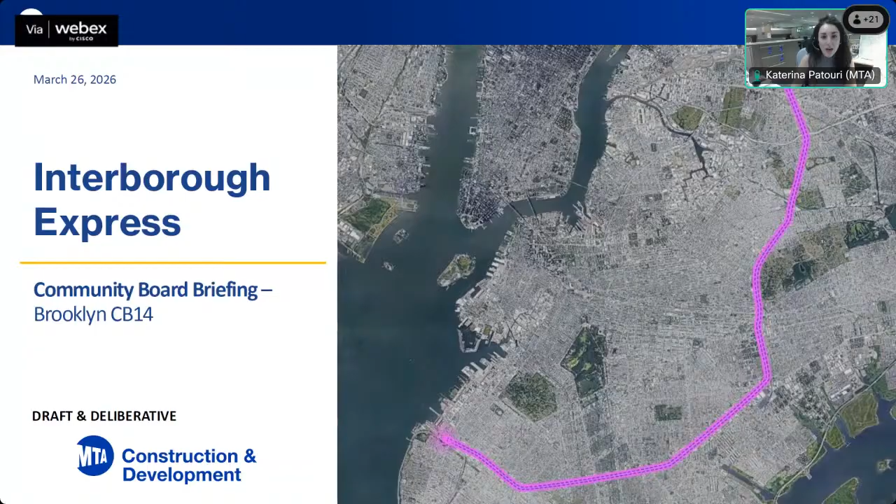This is a project that's been a long time coming, but we're very excited that we have, as of now, officially begun the preliminary design for the project. So with that, we have a presentation prepared for you this evening. We will have some time as well for Q&A at the end of the presentation. We may not be able to answer all of your questions at this time, as we are in the beginning stages of our project design. But just to reiterate, this is not the last time that you'll be seeing us. This is just the first of many touch points that we'll have with you on the project. So we look forward to answering questions not only this evening, but going forward into the future as we make progress on our design and look for opportunities to get more of your feedback and input.

So with that, I will pass it over to Ali, who will begin to take us through the presentation. Thanks all, thanks so much Katerina. Can everybody see my screen? Okay great. So I'm sure many of you know about this already.

For those who don't, what is MTA's Interborough Express? IBX is a proposed light rail line that would provide a transformative new connection between Brooklyn and Queens. And the good news is we can do this within an existing piece of infrastructure, a rail corridor that is currently used for freight. As you see on the map here, the existing corridor spans from Brooklyn in the south, starting in Sunset Park, and goes all the way up to Jackson Heights in Queens to the north. It's currently used by several freight trains a day, I think 1 to 3. IBX is adding a passenger service to this existing corridor while preserving that freight service. So essentially, IBX would be running on one side with freight on the other, but they're two entirely separate systems.

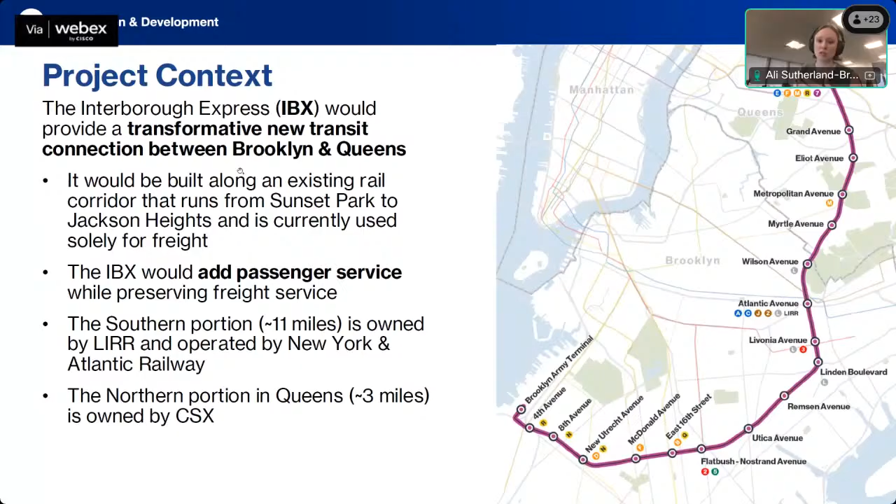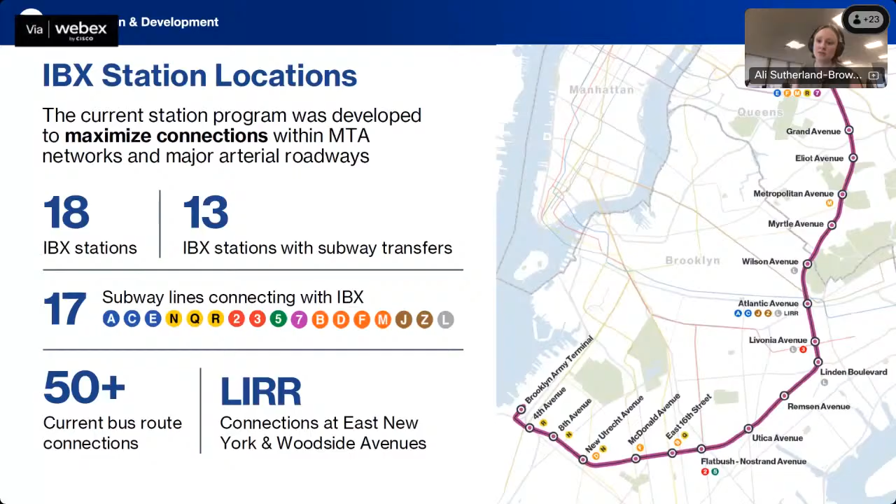That means today, an 18-station program designed to maximize existing connections to the existing transit and major roadway network, specifically connecting to 17 subway lines, over 50 bus routes, and the Long Island Railroad.

We use the word connection a lot when we talk about this project, and I want to get even more specific about what this connection actually does for residents and businesses, specifically here for Community Board 14. At a high level, this means time that you and your neighbors get back for yourself, for your family, for your friends, and then access to opportunity that IBX unlocks.

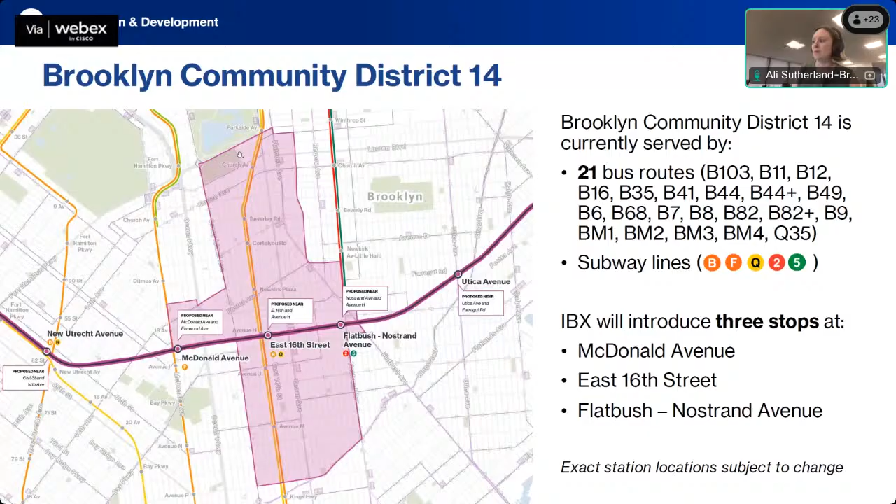Community District 14 is currently served by 21 bus routes and 5 subway lines, and IBX would introduce 3 stops in district: at McDonald, at East 16th Street, and at Flatbush Nostrand. But what do these stops really do?

At a high level, this means that residents gain access to jobs and employment hubs, amenities, recreation, and more. And businesses expand their customer bases multifold, as well as the pool of talent who are able and willing to come to work for them.

And neighborhoods and destinations for CB 14 really expand across the 2 boroughs, as far north as Jackson Heights, as far northwest to Brooklyn Bridge Park, and in the southwest to Sunset Park and Brooklyn Army Terminal.

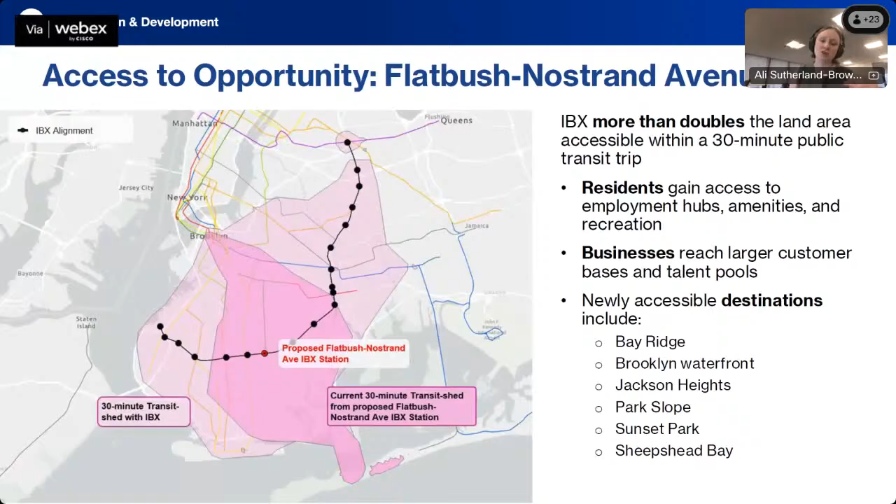Just using Flatbush Nostrand as an example, this means more than doubling the number of jobs, healthcare facilities, and daycare and pre-K that are accessible, increasing higher ed institutions by about 1.4 times, almost doubling the number of cultural institutions reachable in 30 minutes, and then for those businesses, reaching over 2 times the working age population who could shop at, join, or work at your organization.

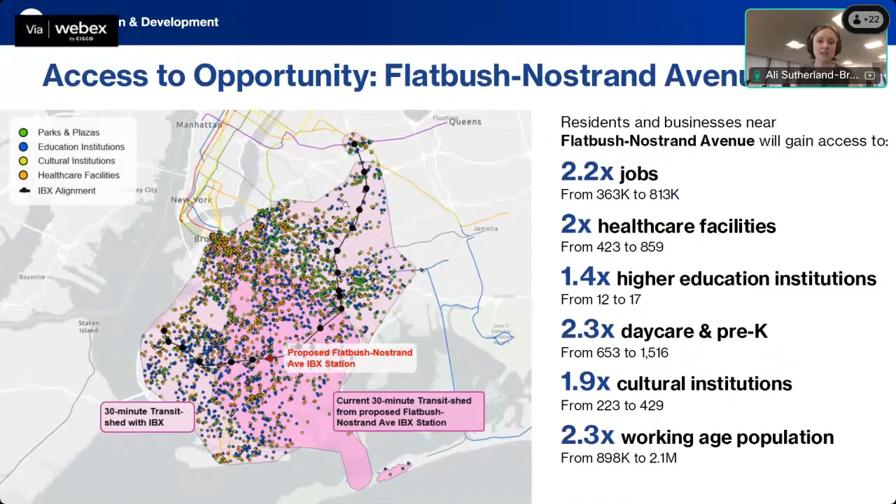We've developed these slides for all 18 IBX stations, and I'm happy to come back to the East 16th and McDonald versions in Q&A.

Finally, before I hand it over to Katie, I want to talk about the 2 simultaneous moving parts to the project right now: environmental review, and then Katie will talk you through design.

MTA kicked off the SEQRA process in October 2025, and this included a scoping phase where we were defining what's being studied, which we did with 2 in-person and 2 virtual meetings. Through that process, we received over 500 comments and are in the process of incorporating those right now into our scope of work. Later this year, MTA will publish a final scoping document along with the DEIS, or Draft Environmental Impact Statement, which will outline both those potential impacts and mitigations to those impacts.

Also included in the DEIS is information about property acquisition, which we know is a big concern for people living along the corridor. Because IBX is located within an existing rail corridor, we have the benefit of using this existing piece of infrastructure and limiting the need to acquire private property. But that said, our number of acquisitions will not be zero, and a small number of properties will need to be acquired for IBX to function.

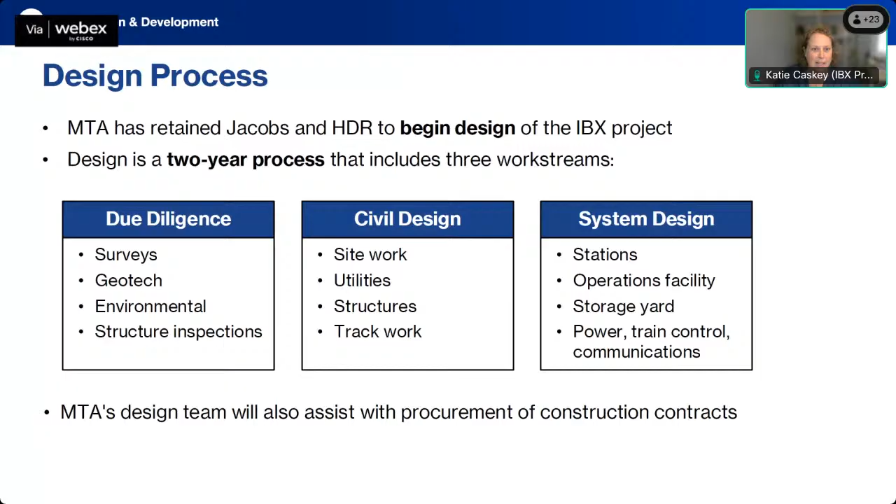Now diving into the active work. As part of due diligence, the design team has been out collecting information about existing conditions. This information will tell us about the project's feasibility and any changes we might need to make from early assumptions based on the real world conditions of the corridor.

We started this fieldwork at the south end of the corridor in late 2025 and are largely working our way north. We anticipate this work being complete in the fall of 2026.

For an update on your area specifically, in Brooklyn we are roughly halfway complete, but for Community Board 14, we've completed 44 investigations with 7 more to go. So while we're largely complete in the area, you can still expect to see crews out working along the corridor in the upcoming months.

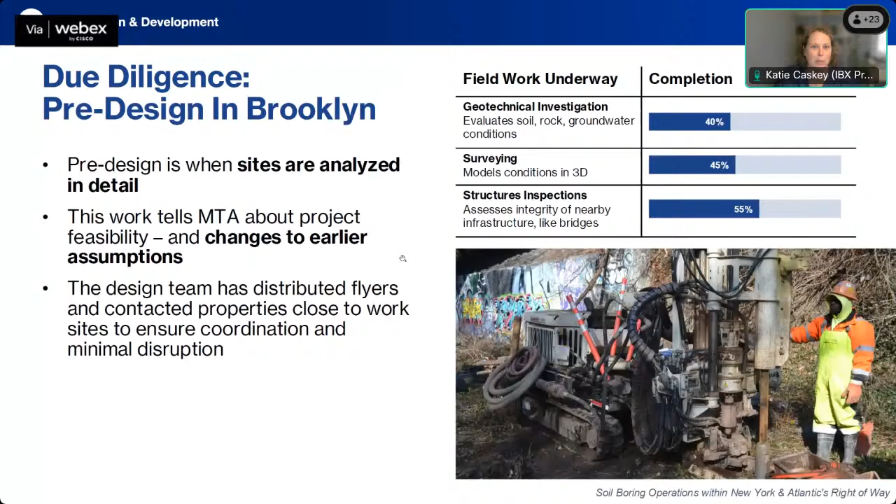Along with this work, the design team has been out flyering within the community to inform people of the work happening. We provide notice roughly 2 weeks beforehand to addresses within 100 feet of the work locations, and we've also been contacting properties close to each location directly to ensure minimal disruption and maximum coordination.

Now to dive into another active work stream, which is the systems design. This work began in fall of last year as well and continues into today. As we design the stations and the urban realm, we are prioritizing things like creating a positive future passenger experience, stations that integrate well into surrounding neighborhoods, accessibility, and connections with other modes of transportation.

But as we do this design work, we also want to know what matters to you all and your neighbors. We will be hosting 6 public workshops in April and May of this year to ask for input on these and related items, and Katerina will talk a little bit more about that at the end.

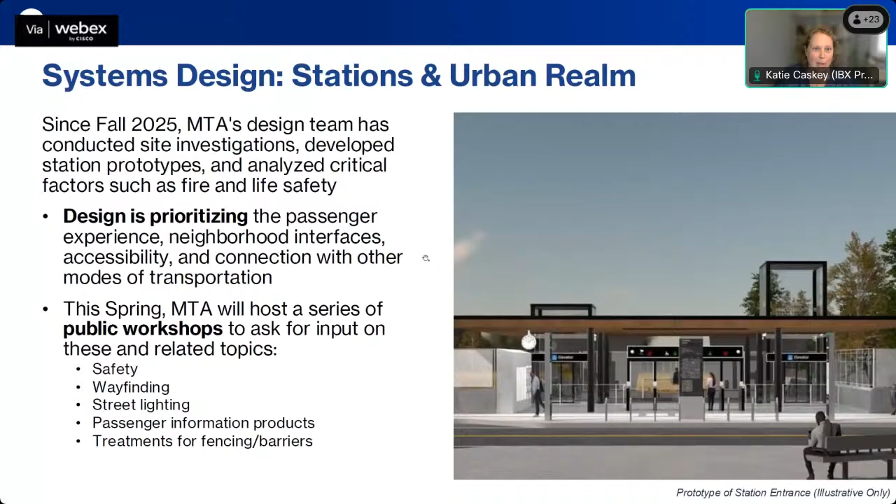Now transitioning to community focus areas. Now that we've walked through the current work, we want to talk a little bit about what we've heard from previous public outreach and how it's informing our design choices as we're in this design phase now.

The first topic I want to talk about is stormwater management. Our goal here is really to be a good neighbor, which means we need to work across government with the agencies that manage other city infrastructure like water and sewer systems. We've been meeting with the city's Department of Environmental Protection to understand current conditions and coordinate for design.

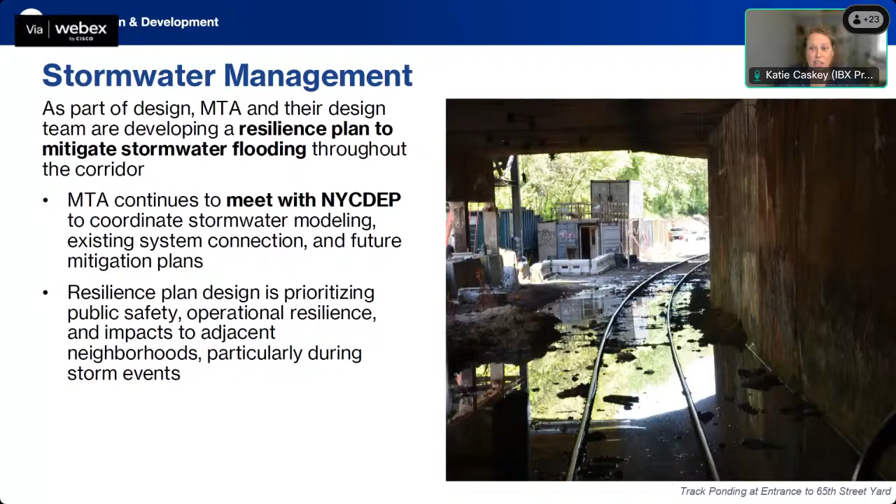We know that portions of the corridor, which are currently a trench, have flooding issues today, as you can see in the photo here near 65th Street Yard. So we need to be comprehensive and look at stormwater and flooding today and think about adaptation for the future. Our entire transit network needs to be resilient to meet New Yorkers' needs, and our engineers are working on a resilience plan customized for each and every neighborhood along the corridor.

The second topic we've heard about is electrical grid capacity. Similar to stormwater management, our team is studying resiliency measures for electrical design. We've heard from the community about grid reliability and capacity, and we want to get ahead of infrastructure capacity issues. Our team has been meeting with Con Edison to understand current conditions and coordinate integrating IBX into the system. It's critically important that we align with utility providers to ensure IBX electrical needs can be met by the grid today and tomorrow.

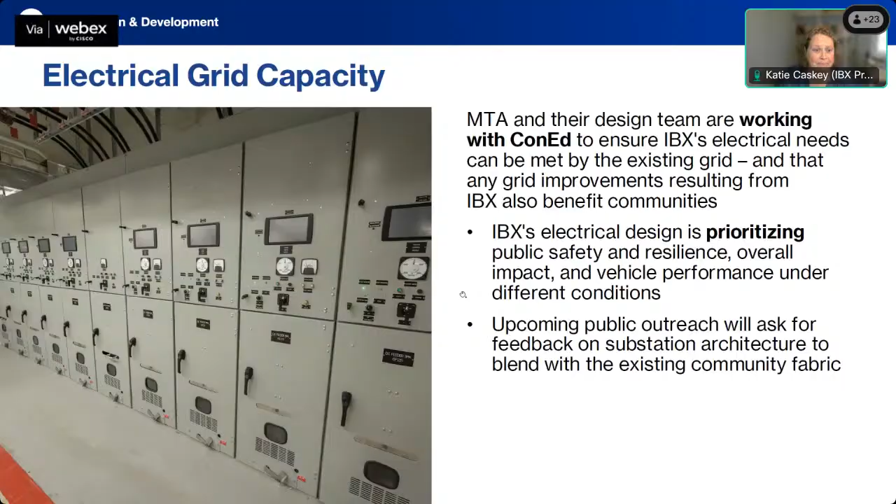With that, I'm going to turn it over to Katerina, who will talk about next steps and upcoming outreach. Thank you so much, Katie. We are extremely excited to be in the design phase in earnest and doing a more robust public outreach campaign this spring.

We talked a little about the public workshops, but really that's going to be one of our main touch points with the community to inform our design decisions. Please look out for those dates and locations coming out soon. These are going to be focused on getting specific feedback and input on things like stations, urban realm connections, layout of our vehicles, and other things like safety, wayfinding, and customer experience items in the system.

We also are going to follow up to receive formal comments on the DEIS as part of our environmental review process, and that is coming out later in the fall of this year.

So one big takeaway here is we really want to meet people where they are. We really want to get as much feedback from neighborhoods as possible, especially on the specifics of how the IBX will be utilized, how it will serve these communities. You know your community the best.

So if you have input or suggestions for us on locations we should go to, groups we should talk to, meetings we might want to attend, we are happy to take those suggestions today or anytime within the next couple of weeks or months. We're looking forward to keeping in touch throughout the life of this project.

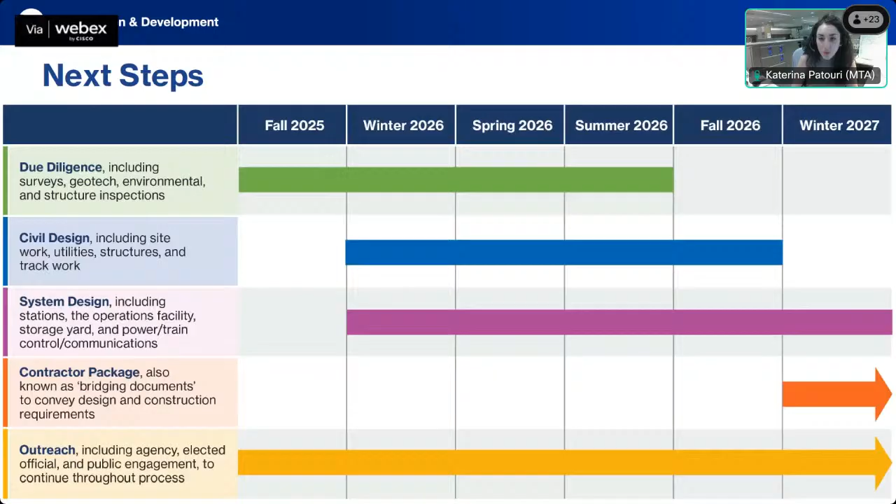The outreach we will continue to do throughout all of these streams. We really want to make sure everyone is kept up to date on all of these milestones and phases as we continue working through the design. So we will make sure to continue to keep the community board informed, as well as our elected officials, and all the groups we identify in each neighborhood throughout the corridor.

So with that, I'll give it back to you, Shawn, to open us up to Q&A. We are excited to be here to answer your questions. As I said before, there may be certain questions that we don't have the complete picture or complete answer for you today, but we're happy to take any question, and of course continue to be in touch with you as you speak to your neighbors and maybe have more questions for us on the project. So thanks again for your time, and Shawn, back to you.

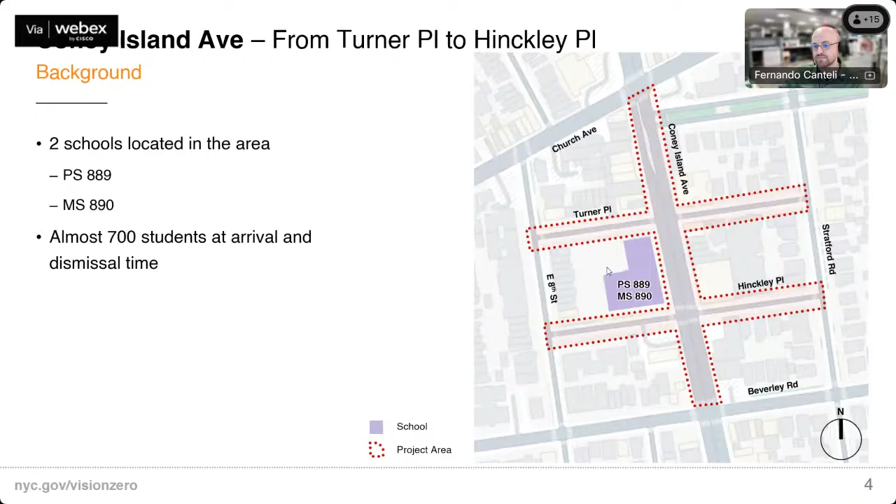4 of the injured were youth, young people under 18, and 7 pedestrians were injured. Of those 7, 2 were actually crossing with the signal as they were supposed to, and 3 were crossing mid-block.

Let's look at the shape of the street and existing conditions, and why some of them are concerning. This section of Coney Island Avenue is 70 feet curb to curb, that's the area we can work with. There are 2 travel lanes per direction, with turn bays in the middle for adjacent streets. It's also a local truck route and a corridor where multiple express bus lines and one standard bus line run through.

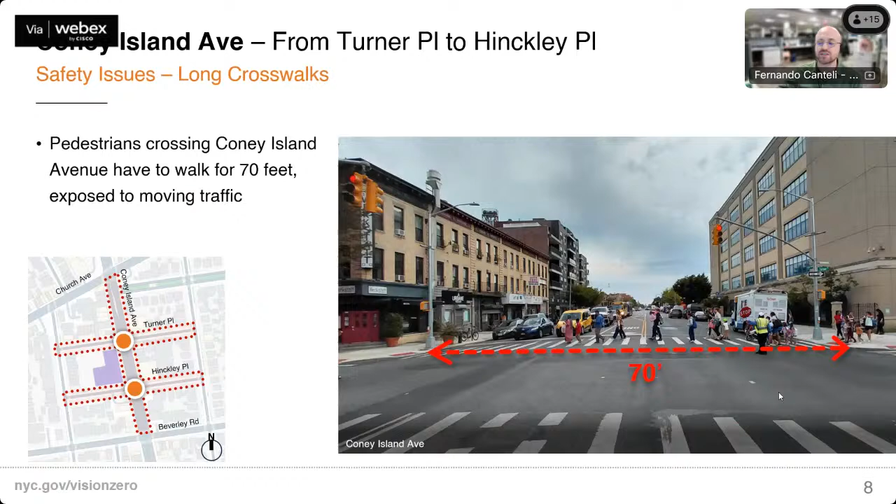In this section, looking north, the school is the blue building with a small garden in front, with a 15-foot sidewalk, which is generous and great. But there's a very long roadway to cross every day for students. A traffic signal was recently installed at Turner Place and Coney Island Avenue, but it's still 70 feet long, so little kids with their parents and middle schoolers have to cross in a short amount of time, exposed to moving traffic the entire time.

Another thing we've observed in front of the school is illegal U-turns. Vans or cars make U-turns sometimes right on top of the crosswalks, which is very concerning and creates dangerous conditions for pedestrians and even for drivers.

So this is just a draft plan. We want to show it to you and get your feedback. It's kind of a very simple idea, but we think it's a great improvement for the school.

As a proposal overview, we want to convert Turner Place to eastbound between East 8th and Coney Island Avenue, and Hinckley Place to westbound between Coney Island Avenue and Stratford Road. So Hinckley Place becomes westbound and Turner Place becomes eastbound for the entirety of the street.

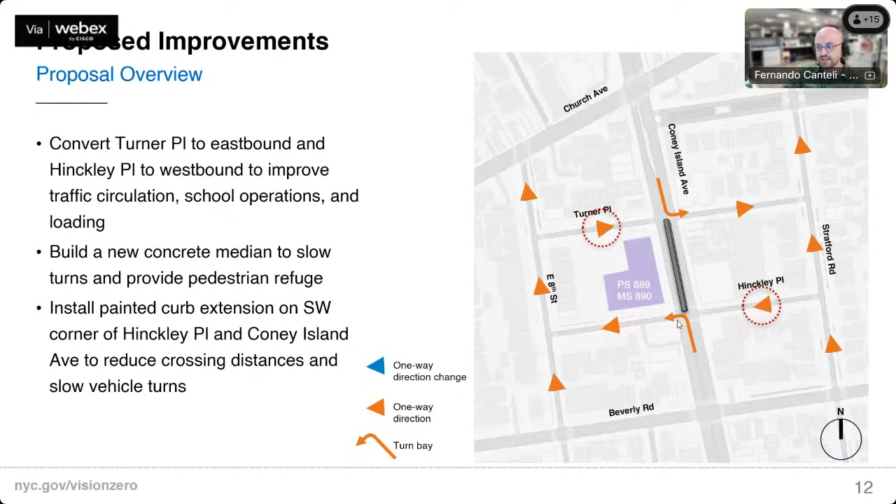We also want to install a small painted curb extension in the corner of Hinckley Place and Coney Island Avenue, in the southwest corner, to reduce the length of the crosswalk. So it's very simple, it's just two street direction changes to make it consistent.

This will facilitate less circuitous trips. It will also be great because one of the things we want around schools, in every school frontage, is right-hand side door access for school buses. So Turner Place will become great for buses to load and unload too, because the buses will be in the direction where the door for the kids to come in and out is on the right side of the school.

Also, this gives us the room I was mentioning for that concrete pedestrian island. So as you can see here, this is the existing condition, and this is what we are proposing: just a concrete median that will reduce the crosswalks and provide a pedestrian island, and a painted curb extension in this corner.

That's it, we'll just change directions. We'll work on small changes to the signals for the direction changes, but that's mostly the entirety of the work. So as we're saying, a median provides refuge for pedestrians and really eliminates the possibility for illegal U-turns on the street.

Our main objective as a school safety unit is to really care about the safety of students coming in and out of school during arrival and dismissal. We visited the site multiple times during arrival and dismissal, and we've worked with the school on different curb regulations to improve school loading and everything around it. Our main objective is to make it safer and more consistent for all the residents around it.

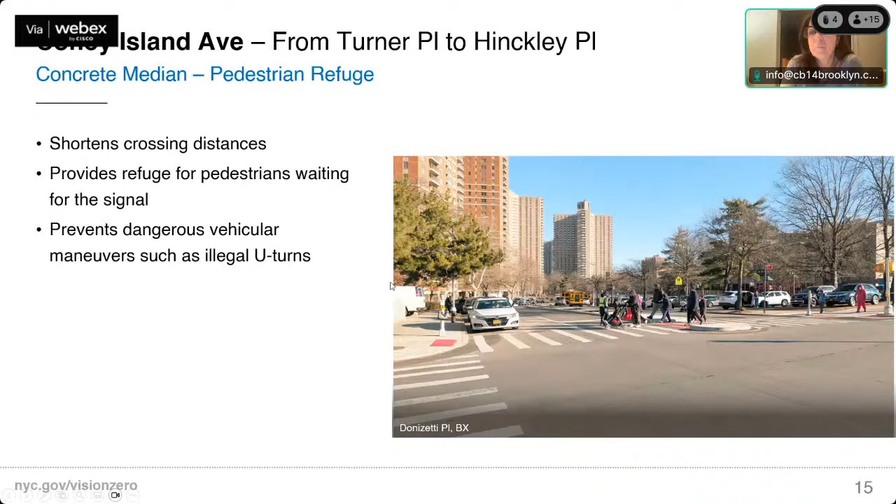Go ahead, Matt. Hi, thanks so much for bringing us this project and presenting this. I think the concrete island thing is a great idea, and you should definitely go forward with it. I think one thing I've observed is that the intersection at Church Avenue and Coney Island Avenue, which is kind of in the scope here, feels even more dangerous to me. And I know a couple of people have been killed there in the last decade or so.

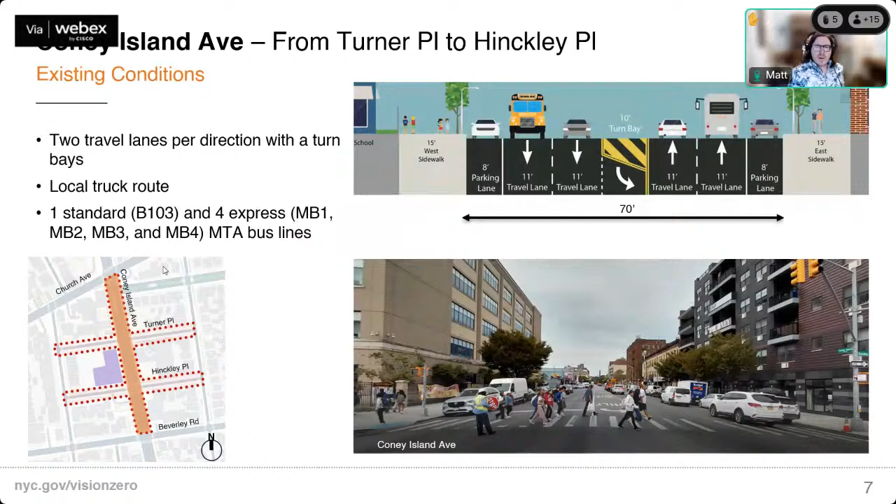I definitely see a lot of students crossing there as well. The B35 bus is there, there's the pizza place on the corner and businesses up and down Church Avenue, so it's a natural place to cross. I'd love to see DOT come back with some proposals for improving safety here.

To give one idea, this is kind of a weird five-point intersection because of the way Albemarle Road comes into it. When I see cars turning in, when I cross Albemarle Road on Coney Island Avenue, it feels like there's very little residential traffic to the single family homes there, and it's not too hard to get into the neighborhood there. So people are just cutting through to avoid the lights on Church Avenue. It seems like a good place where we don't really need Albemarle Road to connect to Coney Island Avenue, and that would simplify the light timing there.

It would simplify the intersection. We definitely see there are unusual rules there with the flashing red light and other things, and drivers don't follow them at all, basically. So that would be one small change, but I'd love to see even bigger changes that could help the whole Coney Island Avenue corridor. But that would be a good place to start. Thank you.

Yeah, so we definitely agree that all the issues you've highlighted, especially at that intersection, are concerning. There's also a curb that has been destroyed this last season, and we're working on getting it replaced. But as we were telling the schools, because we met with them several times, this is a start in front of the school. Obviously DOT has to work thoroughly on the entire corridor of Coney Island Avenue, and Church and Beverly Road are two concerning points. The numbers are very high, and we have to work on that.

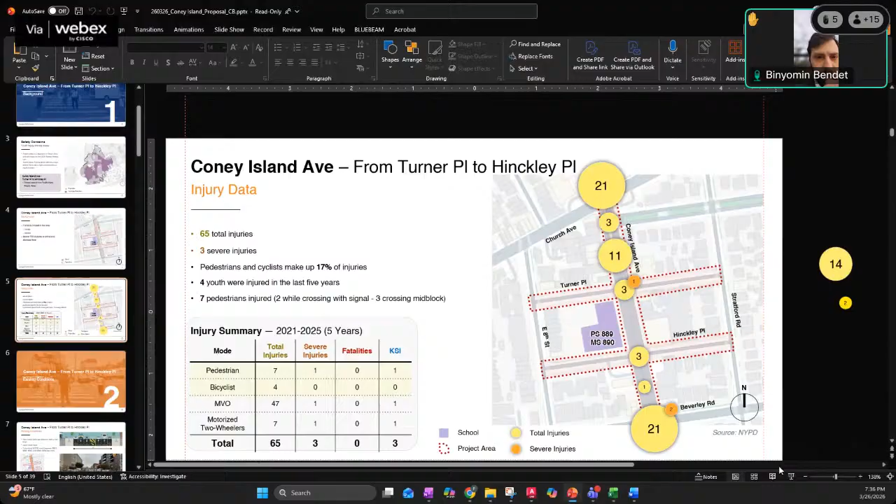All right, great. And we would appreciate if you can send us a quick update once that happens, if there's any feedback in terms of safety. Obviously, safety is important. But could we go back to your first slide for a second? Yeah, the slide regarding the incidents. Right, that one, perfect. So we're looking at that.

We see a lot of the issues are moving motor vehicles, motorized two-wheelers. I'm not saying student safety isn't important, but I'm just focusing on the fact that it seems like a lot of the incidents here are really motor vehicles and motorized two-wheelers. How many incidents do you know of that involve students at the school or teachers even?

So we don't know of any specific incident that triggered this. This is not triggered by a specific incident. Thank God, we're very happy about that. Good to hear. This school was actually on our radar since it was built.

We needed to improve that, we needed to get that signal built. We work really hard placing the schools, helping SCA place the schools in the right place. So it's not directly like a number of kids that needs to get hit for us to intervene.

But we think that with our work we really improve safety for everybody, not only for pedestrians. Like those U-turns are not going to happen. I was there last week to review the site again, and I just saw a crazy fast vehicle trying to turn into Turner Place, not even using the U-turn lane, going over us. So we really think that the concrete will deter those behaviors and will help every street user be safe around the school.

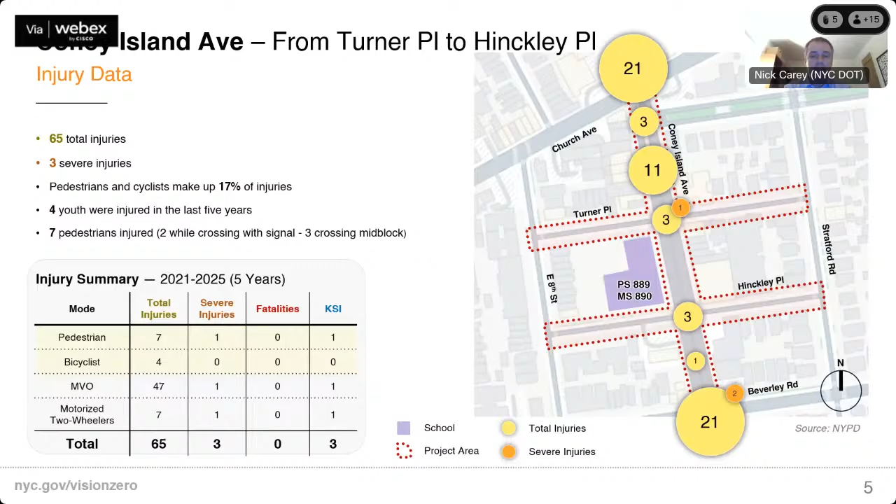Nick, are you there? That's correct. To my understanding, we haven't met with them personally yet. They have been notified about the project and we're waiting to hear comments. But I'm hopeful because this is very similar to other projects installed in different parts of the Coney Island Avenue corridor, including parts in this neighborhood. So we are working with them on it.

Okay, gotcha, and good luck. I hear a very ambitious date to get it done by the summer. So I'm wishing you a lot of luck, but I don't know how fast the wheels will turn on this one, but I guess we'll see.

If you can help us get it done, if the community board can support us, that will get it done faster. So right, that's what I was saying before. In order for us to really support, I mean, I guess I can try to bring up a section of it to the board, but I think we really need CB12's approval also, because if you only get our approval and you don't get their support and we're not talking, we can't really get it done.

So I think after you get CB12's approval, send it, shoot something quickly to us. Shawn is very awesome and very responsive, and then we can move from there. That's what I think is the best way. Thank you. Thank you for letting us know.

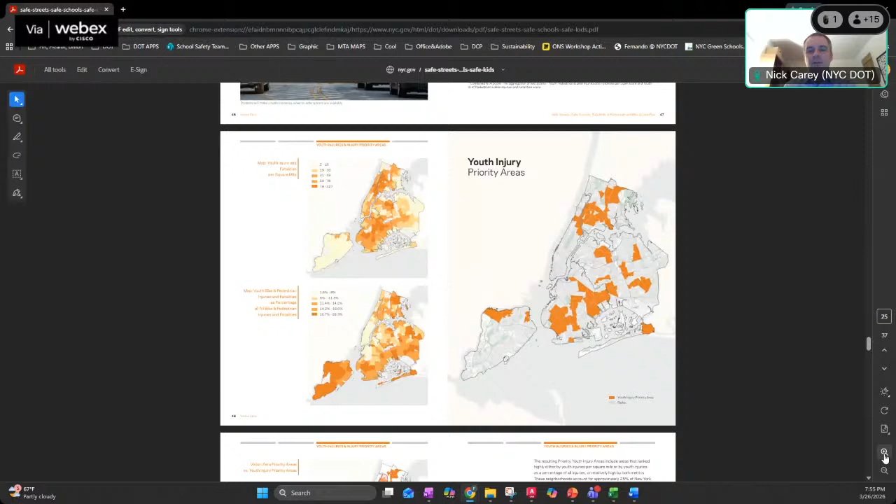And in it, it kind of outlines the methodology in detail. It's basically two overlapping inputs. One is the density of youth injuries, like the number of youth pedestrian and bike injuries and fatalities per square mile. The second input is the proportion of pedestrian and bicycle injuries that are youth. That's in part because there are parts of town where youth injuries are overrepresented, and those are often areas that fall out of our priorities otherwise - areas that are maybe more auto-oriented, where the adults are all driving and it's only the kids that are walking and biking.

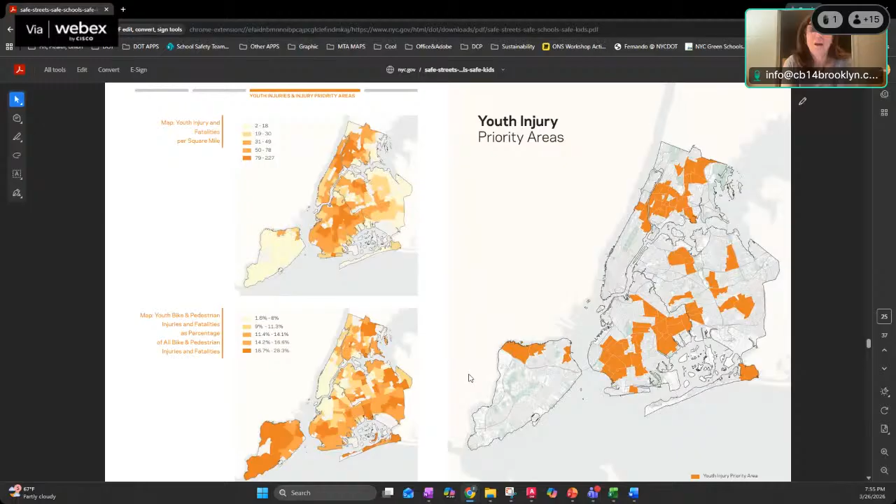So we look at both of those equally and put them on top of each other. Thanks, I'll give that a read. I appreciate that. Rosine? Yeah, thank you, Shawn.

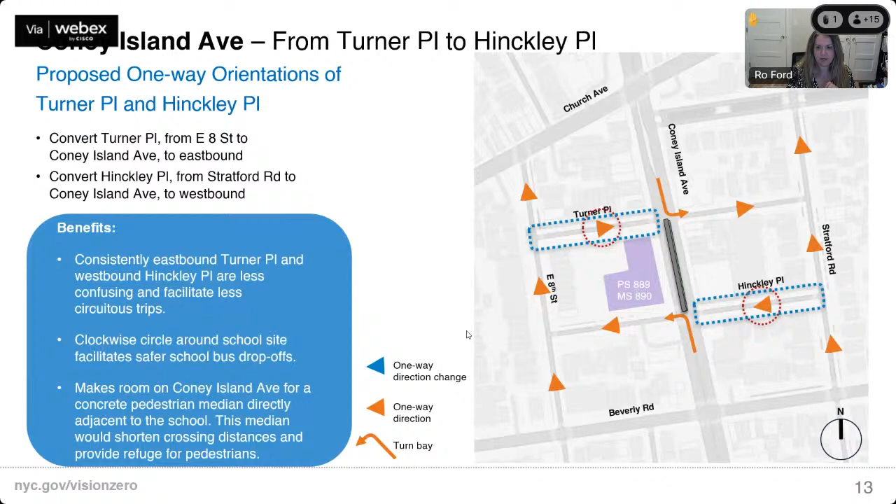These proposed changes are great, and the more I hear, the more I like it. I do want to speak to some points made earlier, I believe by Benjamin, regarding the number of crashes. There are 2 school crossing guards at these intersections at all hours because of how visibly dangerous these intersections are. That's a unique step by DOE. Some schools have none. This one has not 1 but 2 because it's clearly an issue to anyone who sees it. And this artificially lowers, thank goodness, the number of KSI, killed and seriously injured, and pedestrian-involved incidents at these intersections.

So I bring that up not to say these new interventions are not needed, but the crossing guards would tell you they see wild stuff there every day. When you're looking at the numbers, it's important to note why they might be what they are. Anytime I see a number of a kid who's injured, that's too much, but they may not be high enough for some to think this intervention is needed.

And you mentioned the new crossing at Turner Place that was installed. I want to remind everyone, our council member Rita Joseph of the 40th District advocated for that to go in. I don't know if anyone remembers when the truck crashed directly across from the school in March 2024 and entered a building. It had gained such speed on Coney Island Avenue directly in front of the school during the school day that it actually breached the sidewalk and crashed into a building, making it structurally unsound to the point it had to be vacated or redone.